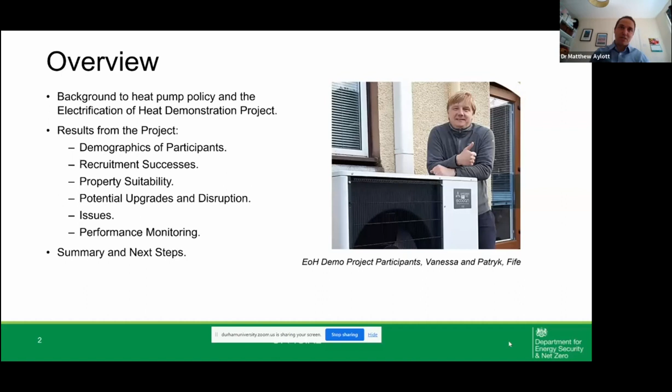Lovely stuff. So yes, as Andrew said, I'm Dr. Matthew Aylott. I'm the Electrification of Heat policy lead in UK government, and I'm just going to talk through some of the results from our Electrification of Heat demonstration project. And I'll give you just a bit of background to heat pump policy in the UK and why the Electrification of Heat demonstration project was created and why it's so important. And then I'll talk through some of the results from the project that we've published over the last 3 to 6 months.

So firstly, why are we interested in electrifying heat? Hopefully people on this webinar will understand the context, but just to lay it out in black and white, heating is responsible for over a third of UK carbon emissions. So reducing our carbon emissions to net zero by 2050 means decarbonising the heating of over 30 million homes and businesses across the UK in a little over 25 years or under 10,000 days. So a really big challenge that we've got in front of us. In addition, around half of the natural gas demand in the UK is used for heating. So moving away from fossil fuels and decarbonising our home heating and businesses is also an energy security priority.

Our analysis in the department suggests that heat pumps will have a particularly important role to play in all future heating scenarios, irrespective of the role of other technologies like hydrogen for domestic heating. And that's why we're introducing some ambitious policies to deliver 600,000 heat pumps a year by 2028. And as you can see on the right-hand side there, in terms of the cumulative deployment, about 1 in 10 homes by the end of the decade will have a heat pump installed. So a really significant challenge from where we are now.

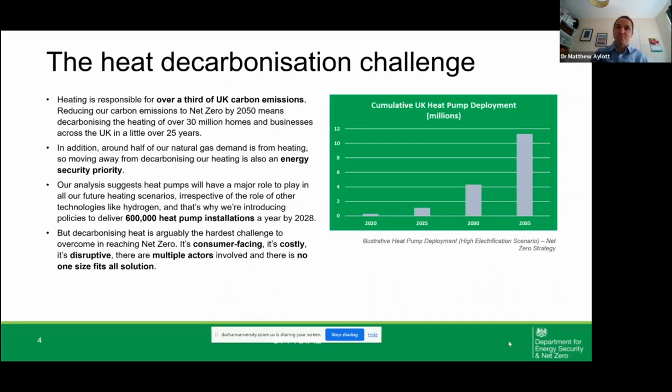And in particular, decarbonising heat is arguably the hardest challenge to overcome in reaching net zero. It's consumer facing, it's costly, it's disruptive. There's multiple actors involved in the supply chain, and there is no one size fits all solution. So that was part of the background to UK heat policy, and one of the reasons why it was really important to deliver the Electrification of Heat demonstration project.

The project started way back in November 2019 and set out to demonstrate the feasibility of large-scale rollout of heat pumps in the UK. And we wanted to do that by obtaining evidence of consumer motivations for choosing a heat pump, understanding their experience across a range of different social demographic groups and consumer archetypes. We also wanted to obtain evidence of heat pump suitability across the particularly diverse range of different housing archetypes we have in the UK. And we also wanted to obtain real-world performance from heat pumps and demand profiles across a range of different housing archetypes and social demographic groups.

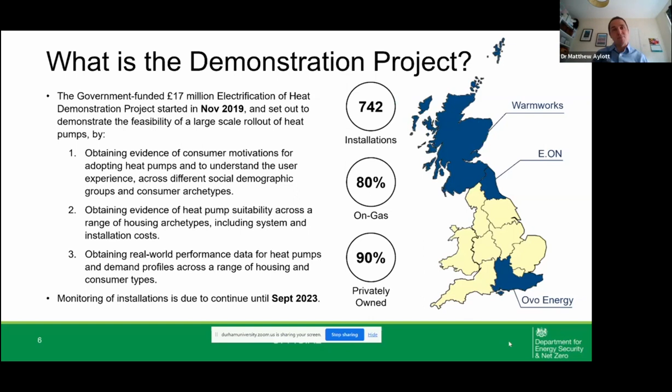So how did we approach the trial? Well, firstly, we recruited consumers, and I'll touch on that a little bit later, to take part in the project. We undertook home suitability surveys of a selection of properties to determine their suitability for a heat pump. Then we did detailed technical design for properties to understand the costs and the system design. And then we installed 742 heat pumps and monitored all of those heat pumps over the course of the project, which in some cases will be about 3 years worth of monitoring data.

At the same time, we did surveys at each stage with consumers to understand why they chose to be involved and the particular issues or barriers that they were experiencing. We also did, and perhaps equally as important, non-participant surveys, so reasons for people exiting the program at the survey stage or the design stage.

So now I'll cover off some of the results from the project. So in the first instance, we received about 9,000 expressions of interest in participating in the demonstration project. From this pool of households, we recruited just over 3,000. Then we did surveys with about 2,500 and subsequently installed 742 heat pumps.

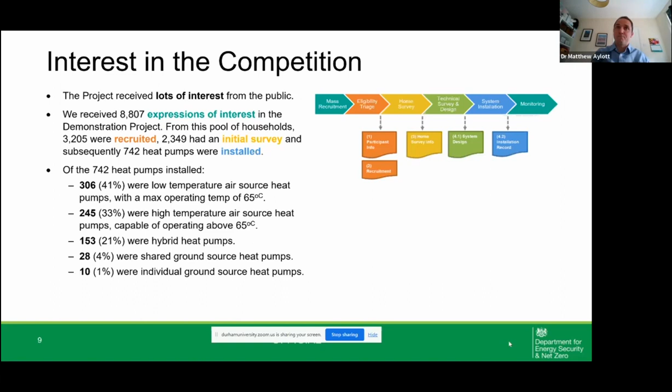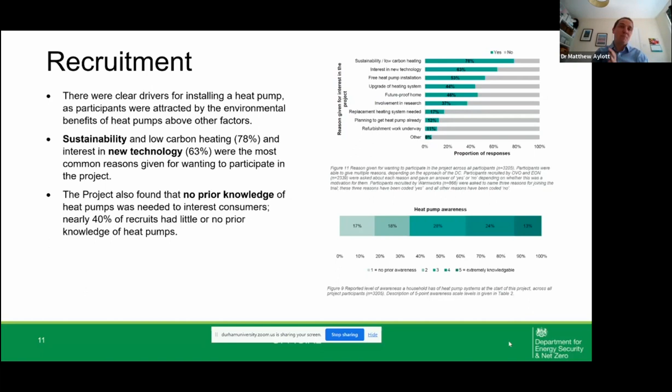In terms of our recruitment, a lot of people were driven by things like sustainability or interest in new technology when they were choosing to participate in the project, more so than just receiving a free heat pump installation, which was good news to us. One of the perhaps more interesting findings was that the project found that no prior knowledge of heat pumps was needed to interest consumers. So about 40% of people recruited had little or no prior knowledge of heat pumps.

It's also interesting to look at the different approaches that the three delivery contractors that we employed took. We employed OVO, Warmworks and E.ON in 3 different areas of the UK. They each had very different approaches to how they recruited. In particular, OVO and Warmworks used a lot of social media and digital communications, which perhaps skewed the results that they got in terms of how they attracted perhaps greener customers or those of a slightly younger demographic, whereas E.ON used more traditional approaches and got a much larger share of people from direct mail campaigns.

And that might have been one of the contributing factors to why E.ON, for example, got a lot of hybrid heat pumps installed, whereas OVO and Warmworks didn't.

In terms of the people who dropped out of the project at various stages, we had 845 households opt not to progress to install before having an initial survey, and 725 households dropped out after the initial survey. That's fairly typical of big trials like this. We expect people to drop out, and perhaps it is not a symptomatic issue with people choosing to install heat pumps. In particular, the main barrier that we found was disruption, and about 47% of participants who declined a heat pump installation cited disruption as their contributing factor.

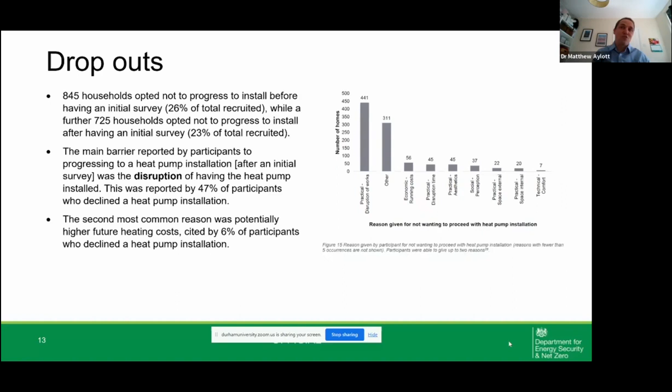In terms of suitability, what we found was that heat pumps were broadly suitable across a wide range of homes, including flats and terraces, which have previously been seen as harder to treat, and even older homes were really well represented in the trial. But there were some properties that were not technically suitable for a heat pump. To some extent, that reflects the budget and the technologies that we allowed into the project, but around 19% of the total number of homes were not technically suitable for a heat pump based on the criteria that we employed in the trial.

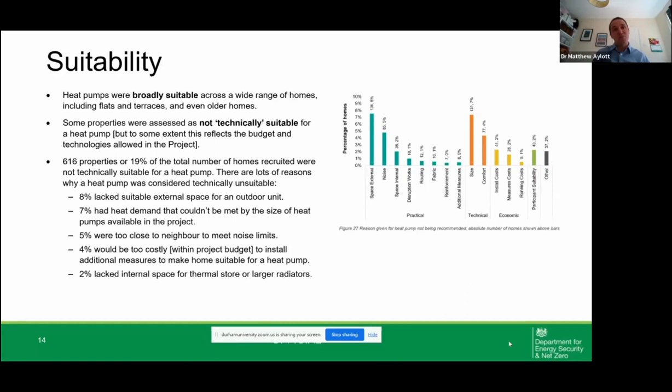I've listed there just some of the key contributing factors to why properties weren't technically suitable. That included lack of external space for an outdoor air source heat pump unit. In some cases, the heat pump couldn't meet the heat demand for that property. In other cases, the heat pump would be too close to a neighbouring property to be within permitted development rights. In some cases, it would be too costly to install any additional measures, and in a smaller minority of properties, they lacked the internal space for the larger radiators and the hot water tank.

I think another really interesting finding from our perspective was that deep energy efficiency upgrades weren't necessary to install a heat pump and still get a good level of performance. Energy efficiency upgrades were only made in roughly 15% of properties where a heat pump was installed, and we installed heat pumps right across the spectrum from EPC A-rated buildings through to EPC G-rated buildings, and in most cases a heat pump was recommended for all of those property archetypes based on their EPC rating.

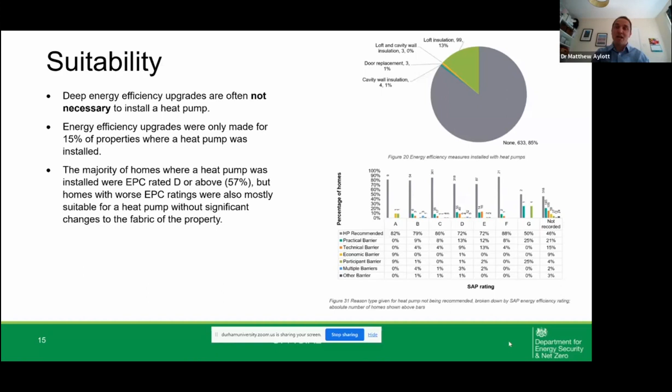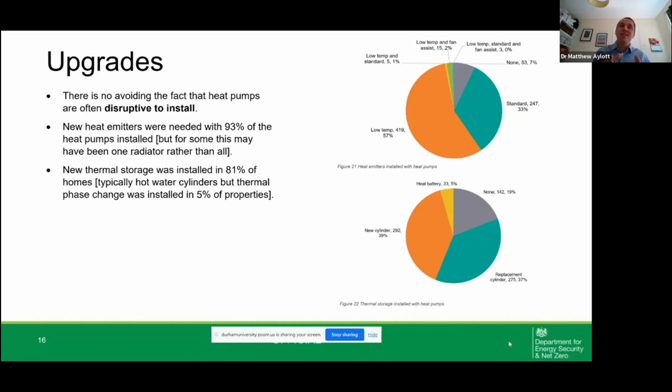In terms of upgrades that were necessary, over 90% of properties required heat emitter upgrades, so new radiators, usually double or triple panel radiators. We also found a large number of properties required new thermal storage. Even in some cases where they had existing hot water cylinders, they might not have been suitable for a heat pump.

We did experience some installation issues, and there were some issues with the quality of the installations, a lack of lagging, some issues with clearances. MCS, the Microgeneration Certification Scheme, is designed to be the quality assurance mechanism to ensure all heat pump installations are of good quality. The design standards were sometimes misunderstood. In some cases, that led to oversizing of heat pumps or uncertainty in how to account for rooms with no heat emitters. So there were some clear lessons to be learnt from that aspect of the project.

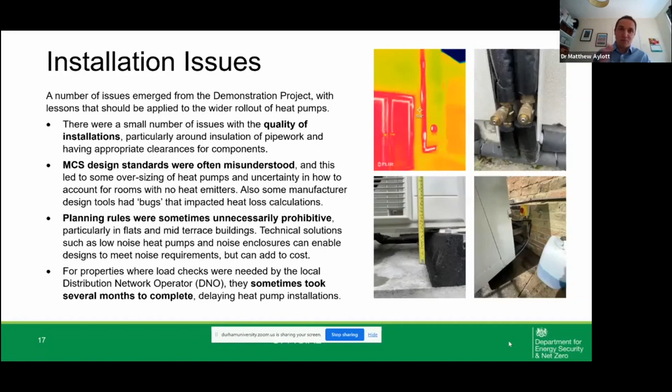Planning rules were also sometimes quite unnecessarily prohibitive, particularly for flats and mid-terrace buildings because of noise constraints. And in some cases where a heat pump might have required load checks to be carried out by the distribution network operator to ensure that they had sufficient electrical capacity, that could take several months to complete. Not all properties require load checks. It's usually around 15 to 20% of properties that would require a load check.

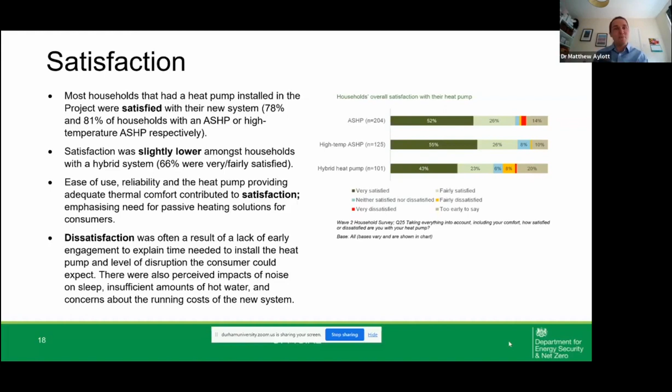Generally, we found, and this was a really positive for us, that there were very high levels of satisfaction with the air source heat pumps and the high temperature air source heat pumps installed. Ease of use, reliability, and heat pumps providing adequate thermal comfort were the principal contributing factors to satisfaction, emphasizing the need for passive heating solutions. Most consumers are not active users of their heating system, so it's really important to have those passive heating solutions, which take some of the decision making away from the consumer. But dissatisfaction was often a result of a lack of early engagement to explain the consumer journey, the time that would be needed to install the heat pump, and the level of disruption the consumer might expect.

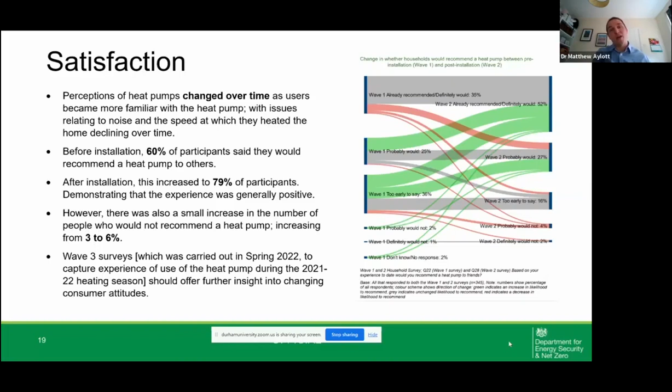Perhaps more positive was that perceptions of heat pumps changed over time as people got more comfortable and familiar with the heat pumps. Some of these issues relating to noise or the speed at which the heat pump would heat up the home declined quite considerably over time. Interestingly, before the installation, about 60% of participants said they'd recommend a heat pump to others. After installation, that increased to about 80%. We're hoping, as part of the next wave of surveys, which we conducted earlier last year, I should say, we will get some more evidence to support how consumer attitudes change over time. So watch this space on that.

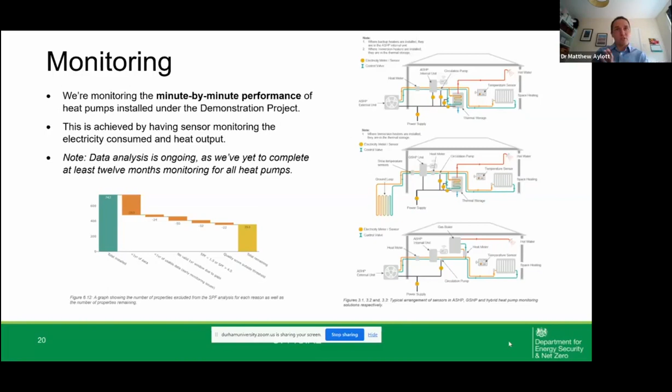And then just to cover off finally, monitoring. So we've monitored all of the heat pumps, as I said, all 742, and got really detailed minute by minute, or 2 minute by 2 minute, performance data of all the heat pumps installed under the demonstration project. And we achieved that by putting in heat meters and electricity meters to monitor the electricity consumed and the heat output from all of those heat pumps. At the moment, we've only got 12 months of data from roughly half of those heat pumps, but I'll share some insights that we've got so far.

So previous trials have shown that on average, heat pumps have a seasonal performance factor, that's the performance of the heat pumps over the year, of around 2.5 for air source heat pumps and 2.7 for ground source heat pumps. In other words, for every 1 unit of electricity used to power the heat pump, over a year, it'll deliver an average of 2.5 to 2.7 units of useful heat into the building. Or put another way, the heat pumps were 244% or 271% efficient. What we found, however, from the demonstration project was that seasonal performance factors have improved considerably from earlier trials, and for the air source heat pumps, performance had reached about 2.8, and for the ground source heat pumps, it's likely to be above 3.

We haven't got a complete data set for ground source heat pumps at the moment, but there is still a massive performance gap between the lab measured and lab tested performance and the in situ real world performance. That all being said, though, it's good news in terms of an average.

The average performance of a heat pump is 3.3 times more efficient than a gas boiler, which coincidentally is also the spark gap between the price of electricity and the price of gas. So running a heat pump at the moment is roughly the same price as running a gas boiler on a standard tariff, but there is a big range and there is lots of potential to increase that figure and make heat pumps more efficient, to switch on to time of use tariffs, which can reduce your heat pump running costs and make considerable savings off bills.

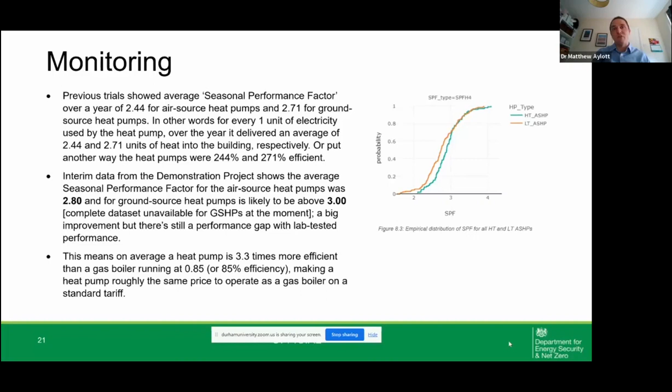The other good news was that heat pumps generally performed exceptionally well, especially and even during those very cold spells that we often get in the UK. We had daily coldest temperatures get down to -6, and we still had a really good level of efficiency and performance of those heat pumps. Even during the coldest half-hour spells where temperatures got down to, I think we had -18 in one case, they were still delivering about a coefficient of 2. So really good news in terms of busting those myths that heat pumps don't work in cold temperatures.

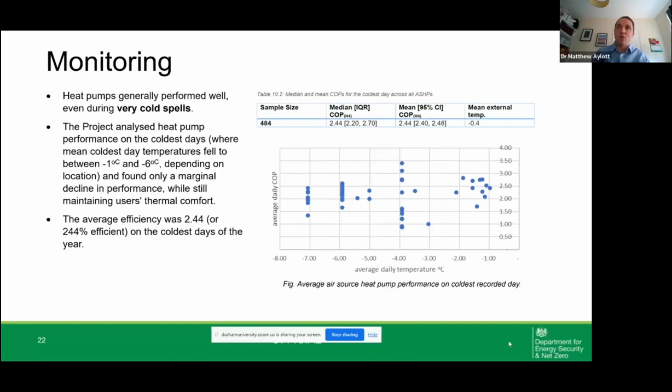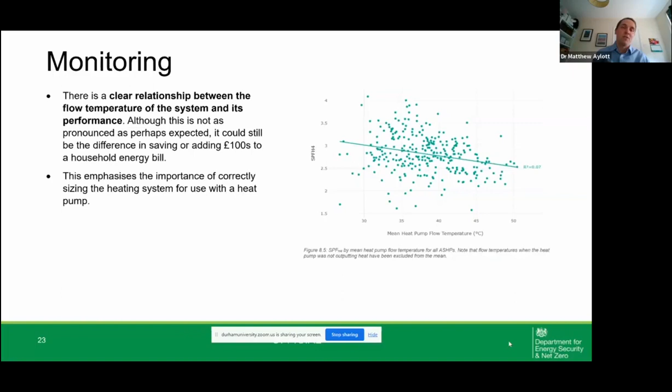There was, however, a very clear relationship between the mean heat pump flow temperature of the heating system. So that's the temperature that gets delivered to the radiators. The lower you can make that temperature, the more efficient your heat pump will be, and in some cases quite considerably more efficient. And that could be the difference between saving or adding hundreds of pounds onto a typical energy bill. So that really emphasizes the importance of correctly sizing the heat pump.

Just to touch on hybrid heat pumps, they didn't perform quite so well, and we'll be exploring the reasons why that might be the case in further research in the future. High temperature heat pumps, they performed very well compared to the low temperature heat pumps. They might be, in some cases, a sort of drop-in solution or a replacement to a gas boiler where they can deliver similar levels of heating. They might negate some of the need to replace and upgrade heat emitters or the need for insulation. But it's also worth noting that high temperature heat pumps also modulate their output. So they very rarely actually operate at those high temperatures, maybe less than 1% of the time.

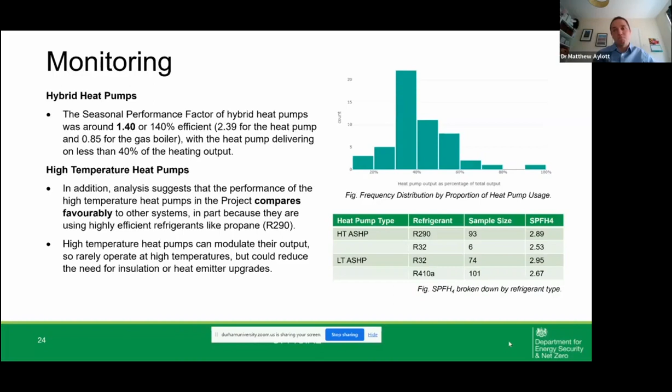And then just a final summary and next steps. So most homes recruited to the project were found to be technically suitable for a heat pump. People were attracted around the positive environmental impacts of heat pumps and investing in new technology. Higher than anticipated disruption was one of the principal drivers for people dropping out. Participants were generally very satisfied with their heat pumps. There were some issues, however, with the quality of installations and oversizing of the heat pumps, and there were some delays in processing load checks, for example. But generally, we found really positive consumer feedback, and the performance of the heat pumps was around 30 to 40% higher than previous estimates of performance.

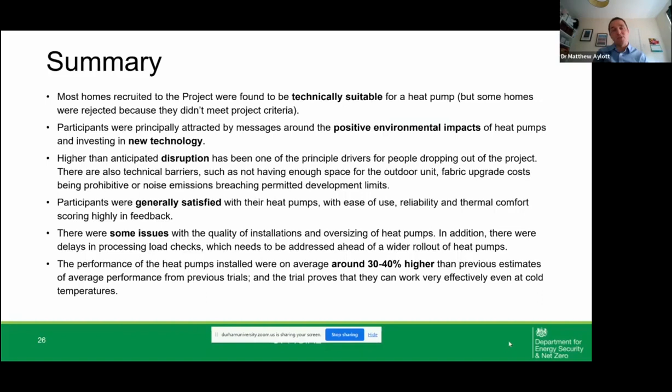And in terms of next steps, all of our installations are complete. We'll continue monitoring those systems until at least September 2023. We've been publishing a huge raft of different outputs from the projects. We have an online tool to check if your home is suitable for a heat pump. We've published case studies, video case studies, written case studies, user guides, installer guides, participant recruitment reports, installation and performance reports, as well as the raw data behind that. We'll be publishing more performance data later in the year and our final project report. And this research has already been hugely useful in informing policy decisions and is also helping us prioritize future innovation funding through programs like our Heat Pump Ready Innovation Program.

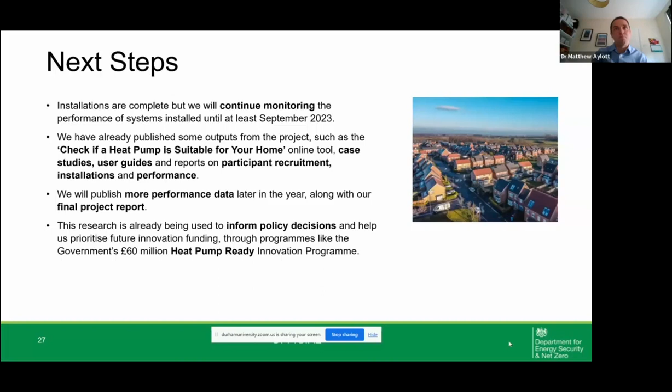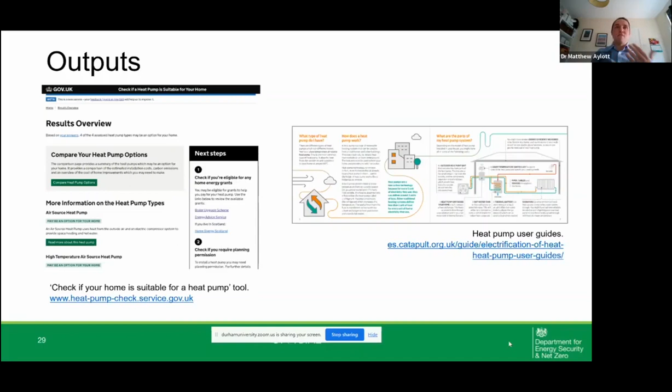And I won't talk through any of these outputs, but just a flag, I've included in the presentation some links to the various outputs that we've got. So please do have a look at some of these tools and resources that have been published online. They're really good tools and resources, and will hopefully be really useful to academics as well as us poor policymakers.